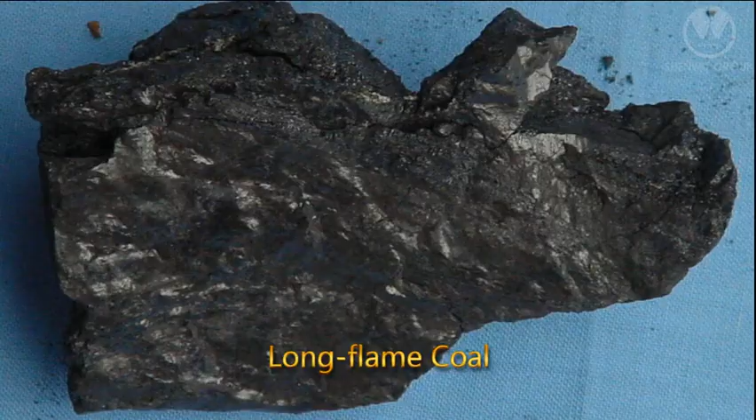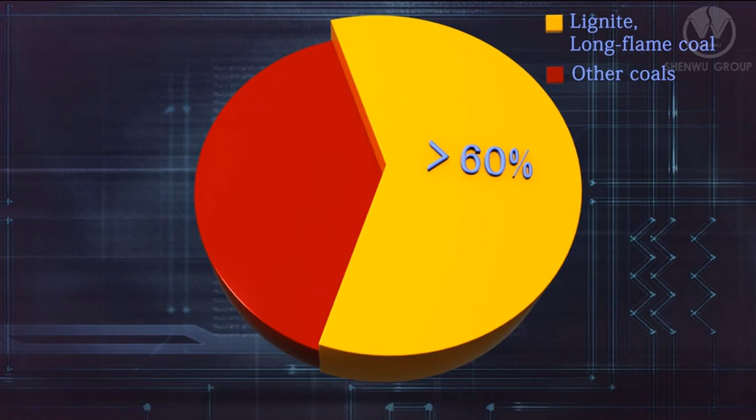The reserves of lignite, long-flame coal, oil shale, asphalt ore, etc. in the world are very rich. The reserves of lignite and long-flame coal in China account for above 60% of its total coal reserves, which has the characteristics of low coalification degree, high moisture content, high volatile matter, lower calorific value, etc.

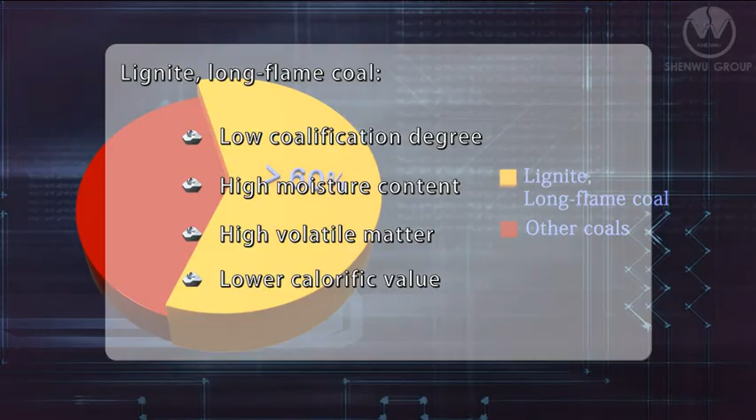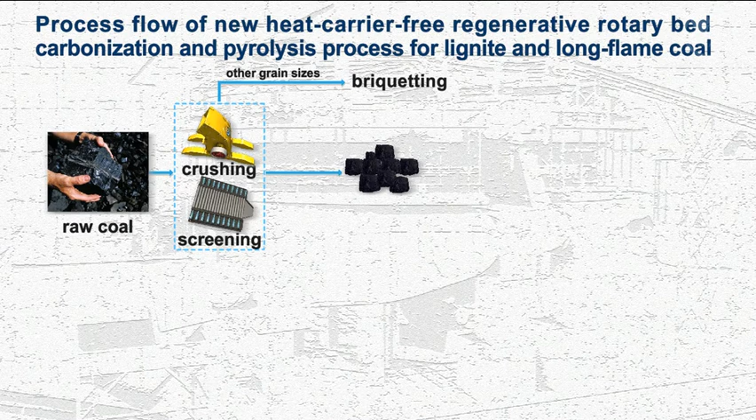The new regenerative carbonization and pyrolysis process for lignite and long-flame coal via heat carrier-free rotating bed, invented by Shenwu, is a pioneer worldwide. This process adopts the regenerative radiant tube heating technology and rotating bed carbonization and pyrolysis technology with independent intellectual property rights, and works under normal pressure to realize partial gasification and liquefaction of medium and low-rank metamorphic coal to produce high purity and high calorific value artificial substitute natural gas, artificial synthetic petroleum and upgraded coal, which needs neither hydrogenation nor oxygenation.

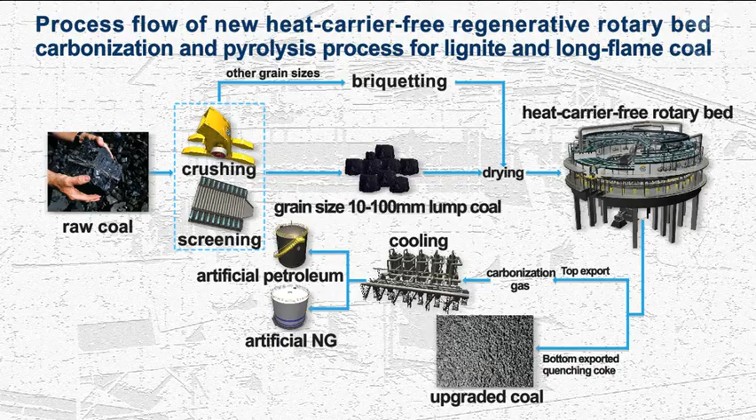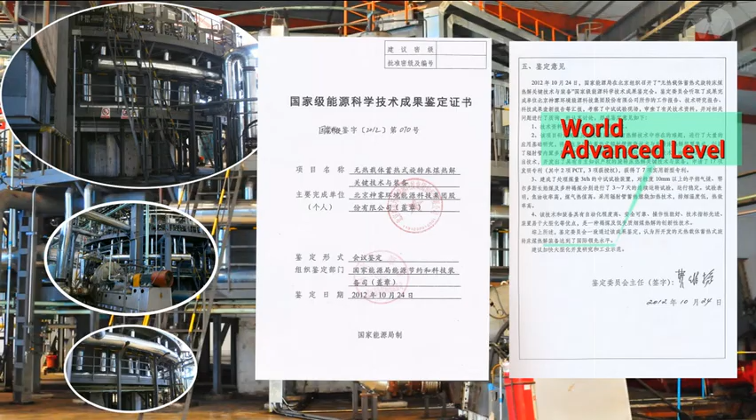This process passed the appraisal organized by the National Energy Administration (NEA) of China, who considers it reaches the international advanced level, in October 2012. Main characteristics of Shenwu's regenerative carbonization and pyrolysis process for lignite and long-flame coal via heat carrier-free rotating bed: 1. Over 1 million tons per annum coal treatment capacity from a single furnace.

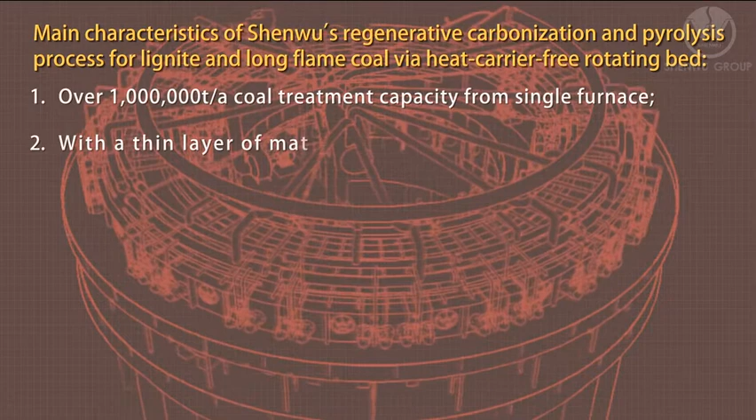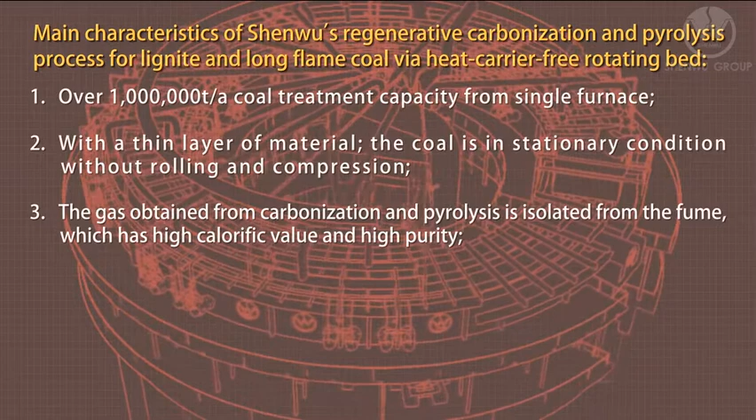2. With a thin layer of material, the coal is in stationary condition without rolling and compression. 3. The gas obtained from carbonization and pyrolysis is isolated from the fume, which is high calorific value and high purity. 4. The fuel with low calorific value, greater than or equal to 700 kcal per cubic meter, can be...

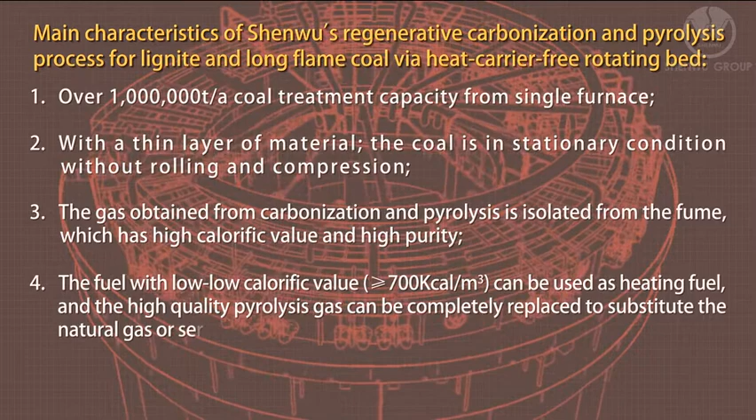used as heating fuel, and the high-quality pyrolysis gas can be completely replaced to substitute natural gas, or served as a high-quality chemical synthetic material. 5. High heat efficiency of carbonization and pyrolysis system, over 90%.

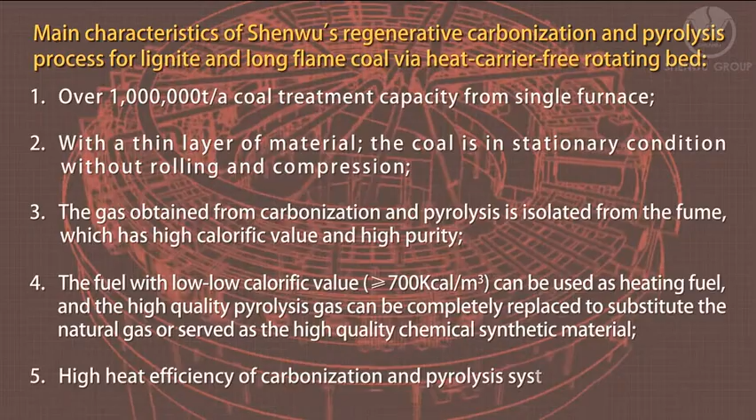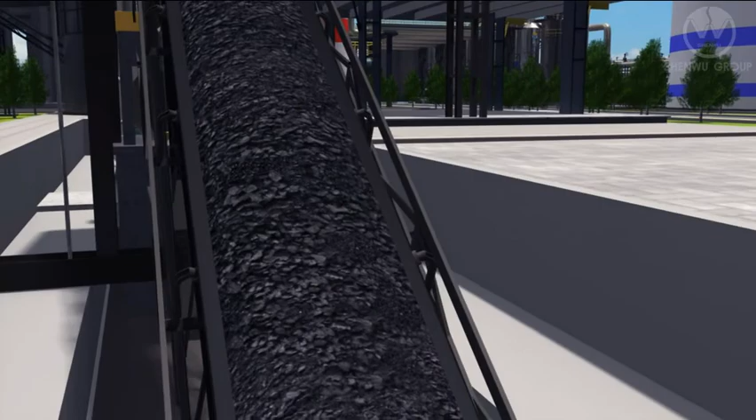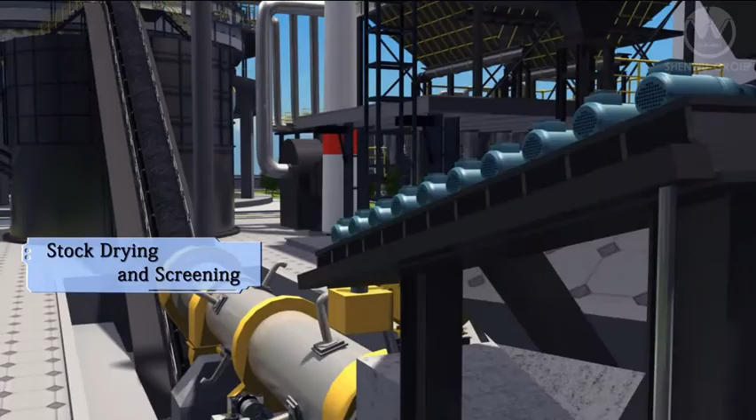The stock from the stockyard enters into the feedstock bin after going through the crushing, screening, and drying procedures. Feedstocks are continuously sent to the rotating bed via the feeder and are uniformly distributed on the furnace hearth of the rotating bed via the distribution device.

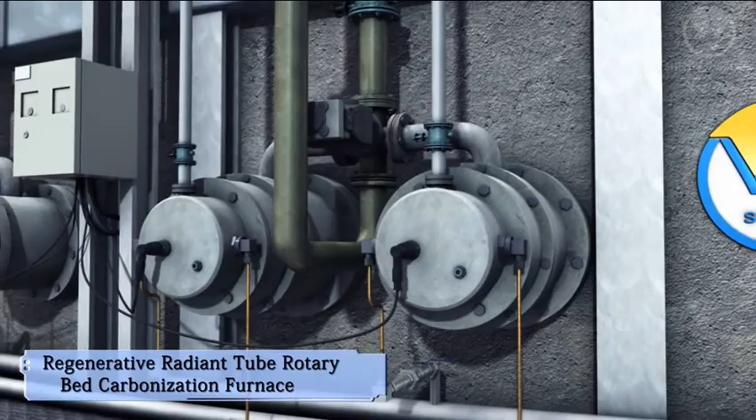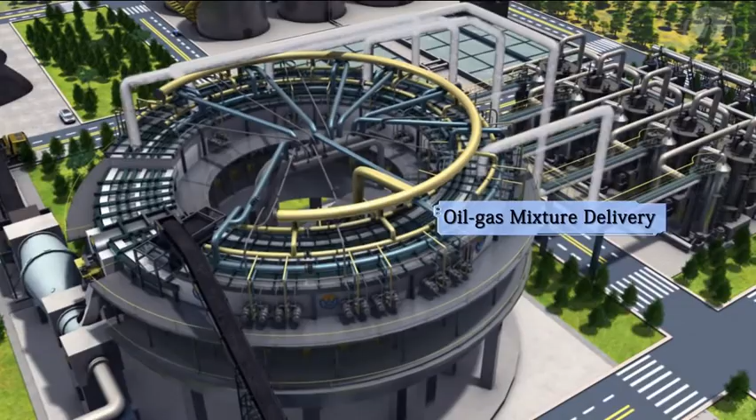The pyrolysis gas generated in the furnace flows upward and enters into the cooling column via gas pipeline. The cooled non-condensing gas is sent into the substitute natural gas storage tank after going through secondary cooling, electric tar catching, debenzolization, desulfuration, deamination, and other purifying procedures.

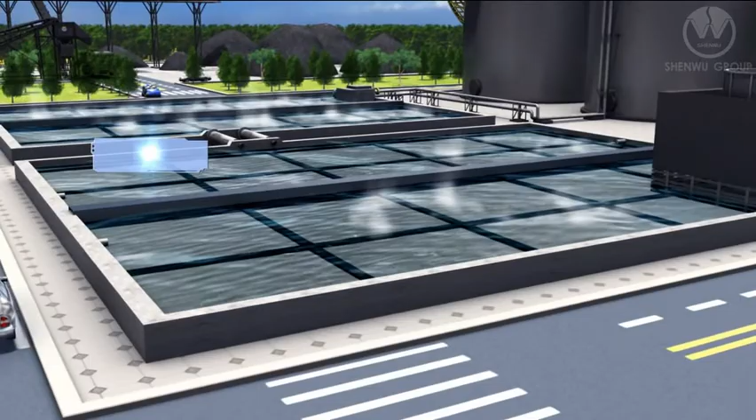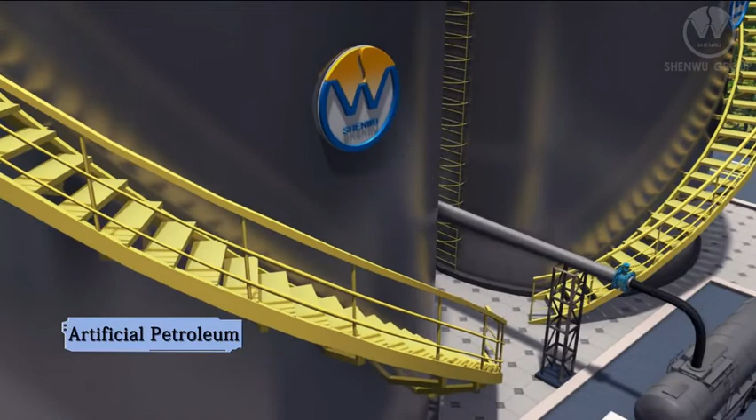The sewage generated during oil and water separation is recycled, and the remaining sewage is sent to the sewage treatment unit. The cooled oily water enters into the separation column where the synthetic petroleum is generated. The synthetic crude is sent into the crude storage tank. It can be used as fuel oil or the feedstock for the synthetic petroleum upgradation plant.

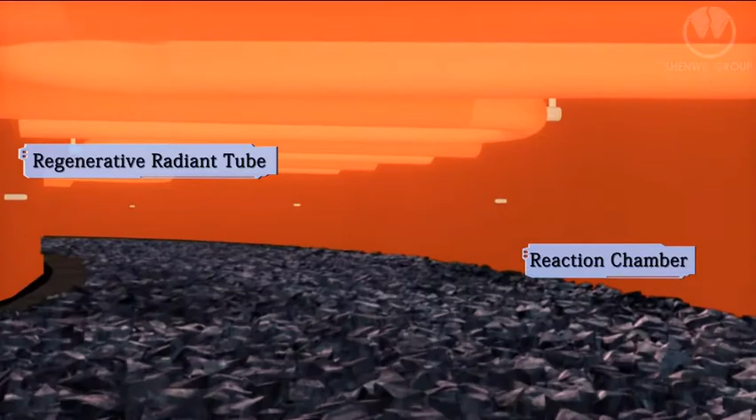Inside the rotating bed carbonization furnace, the roof and wall are kept stationary, while the furnace hearth and stock will rotate through the drive of the hearth mechanism. The regenerative radiant tube burner will heat the stock.

The stock can be pyrolyzed to upgraded coal by controlling the chamber temperature and the rotation of the hearth. And finally, the upgraded coal will be discharged from the discharging port in a sealed way.

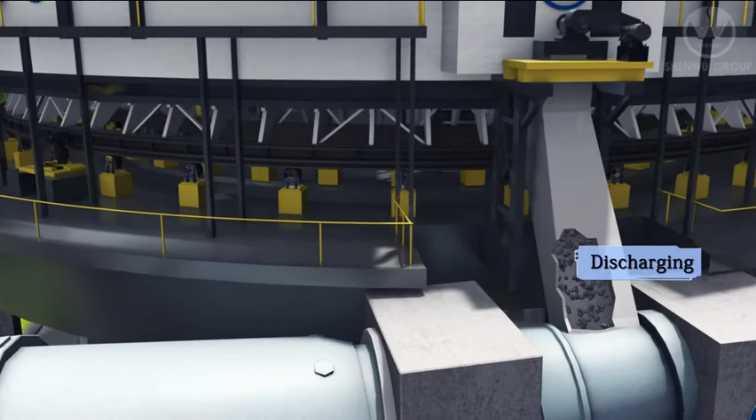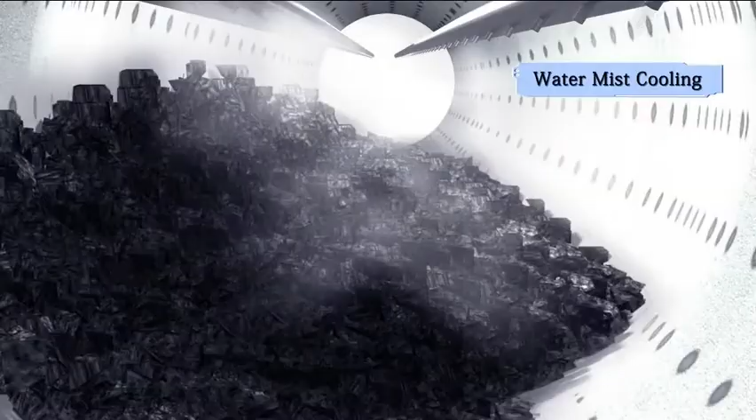The coke quenching by water mist is adopted to cool the high-temperature upgraded coal. A large amount of high-temperature steam is generated after the water mist contacts with the upgraded coal, which will be sent to the waste heat recovery system and exhausted into the atmosphere after being dedusted.

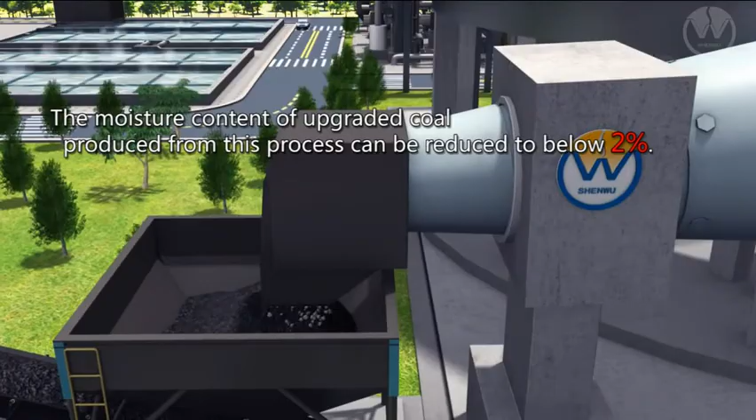The moisture content of upgraded coal produced from this process can be reduced to below 2%. The low heating value of upgraded coal can reach 6,000 to 7,900 kcal per kilogram. It greatly improves the conversion efficiency of combustion, thermal power generation, gasification and liquefaction of the downstream process of coal utilization.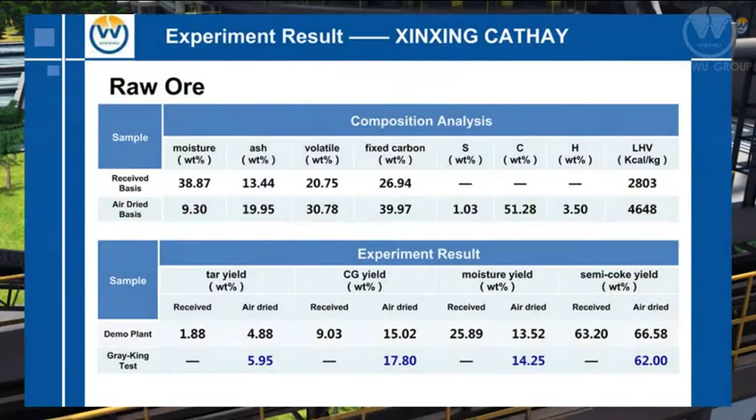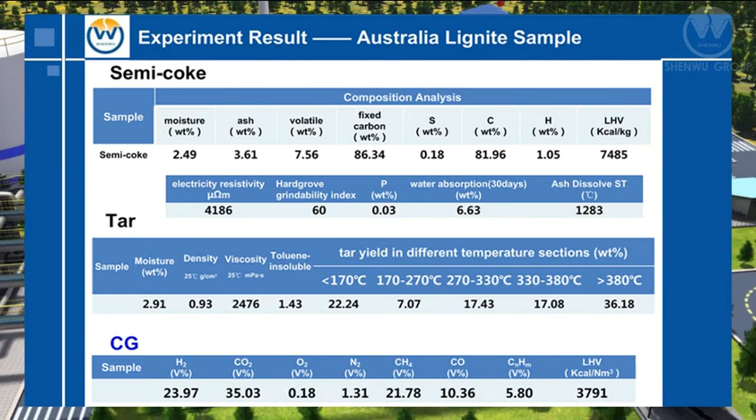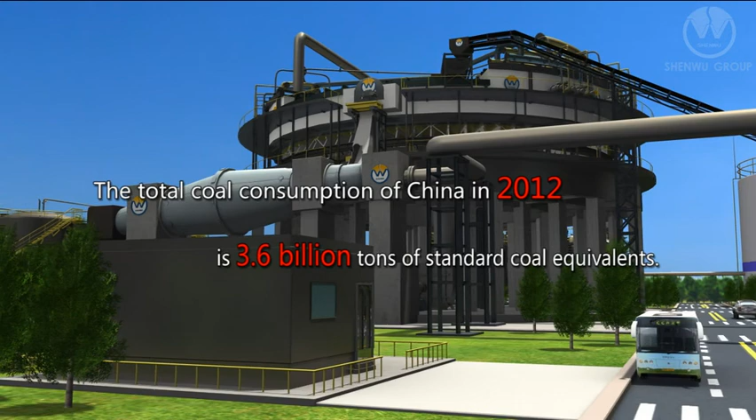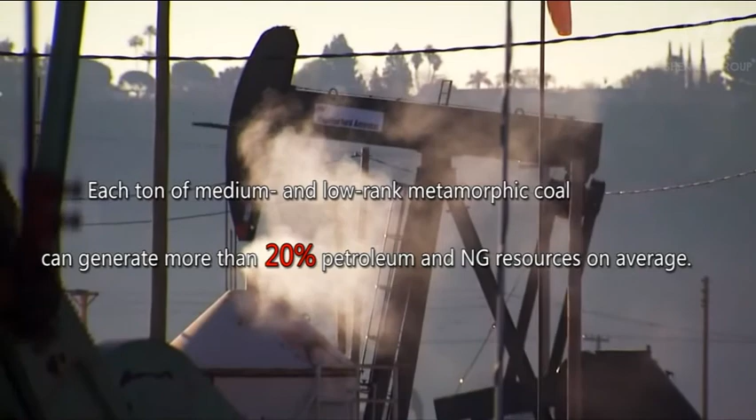The total coal consumption of China in 2012 is 3.6 billion tons of standard coal equivalents. If the petroleum and natural gas (NG) resources are produced with this process, each ton of medium and low-rank metamorphic coal can generate more than 20% petroleum and natural gas resources on average. In other words, more than 700 million tons of petroleum and natural gas resources can be extracted from the coal exploited in the same year.

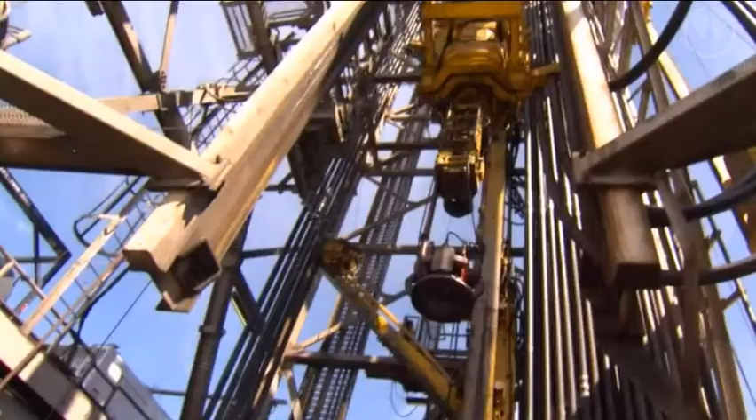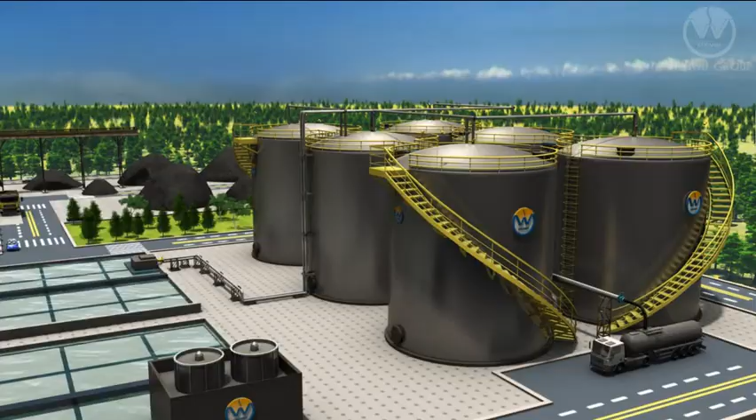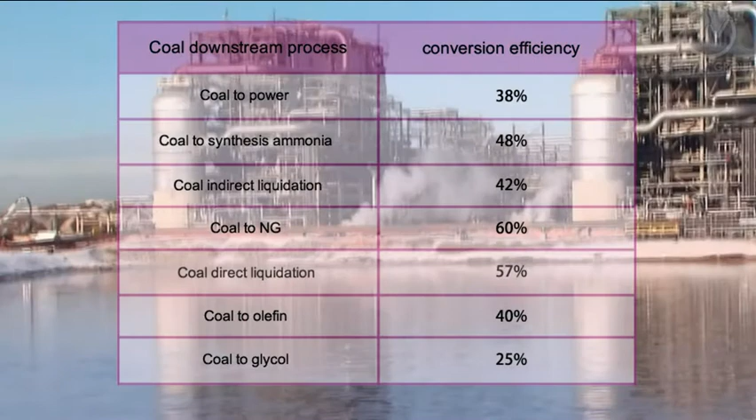In addition, the total petroleum and natural gas consumption of China in 2012 is 580 million tons, of which 58% are imported. Therefore, the promotion of this process can not only effectively reduce the heavy reliance of China on imported petroleum and natural gas, achieve the substitute of petroleum and natural gas in China, but can also guarantee the energy safety of China, compared with the current conversion efficiency from coal to downstream deep processing products, such as coal to power, coal to synthesis ammonia, coal indirect liquefaction, coal to natural gas, coal direct liquefaction, coal to olefin, coal to glycol, etc. in the world.

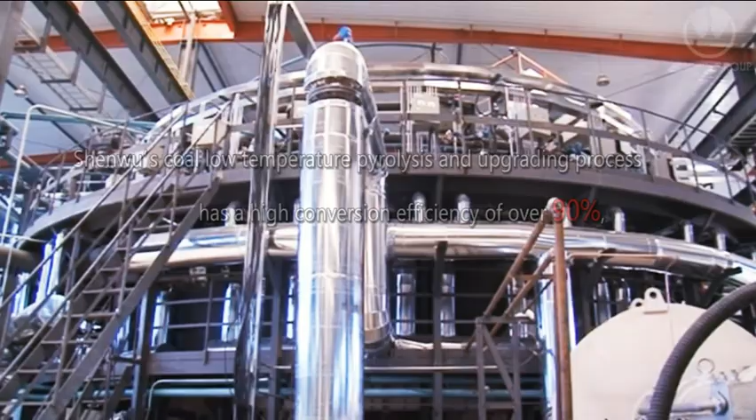Shenwu's coal low-temperature pyrolysis and upgrading process has a high conversion efficiency of over 90%, which can greatly reduce the emission of greenhouse gases like CO2, etc. This will be of great significance to the green low-carbon economy, as well as the sustainable development of the environment.

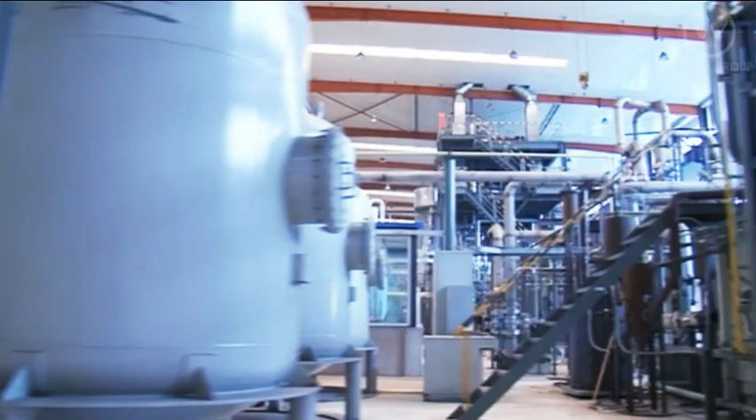Furthermore, since the increased calorific value of upgraded coal, the coal transportation cost can be reduced significantly, and the coal transportation capacity is increased accordingly.